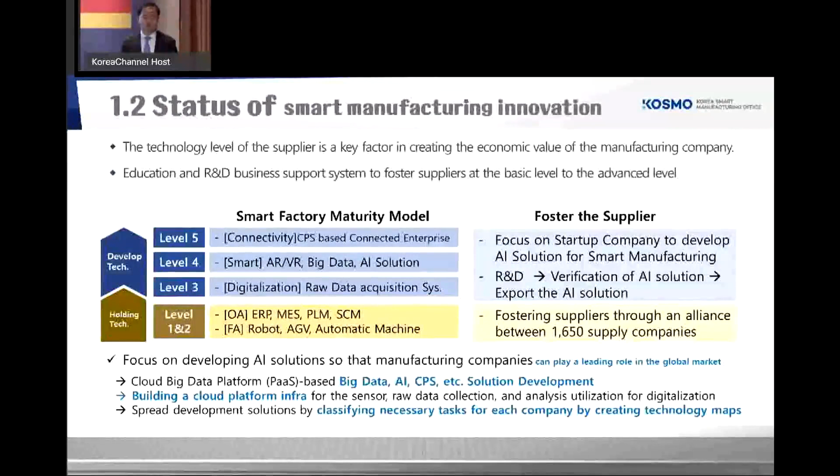We try to turn the labor-intensive industry into a technology-intensive smart factory to enhance the quality of employees' lives. If we want to build a smart factory for the SMEs, but actually most of their work is largely labor-intensive, so all of the labor-intensive work should migrate into the smart factory. So we think about how we can make it happen.

So the first thing is that we need to collect, store, and analyze the data generated from that factory, and that will be moved to cloud data. After a year, that AI technology or solution can be utilized to generate the basic pattern. Then we can generate an AI which is equivalent to 20 years of experience, the skill level of human beings. So that AI will be distributed to the SMEs.

So far I have shared what we have achieved from 2014 to 2017. We have worked with about 5,000 companies. For process performance, productivity has increased by 30% and quality has increased by 43%, and cost has been cut by about 16%. Also, for the smart factory, they have had to hire about 3 additional people, so it generates a lot of beneficial effects. What we have to pay attention to is that productivity has increased by 30%, but sales just increased by 7.7%.

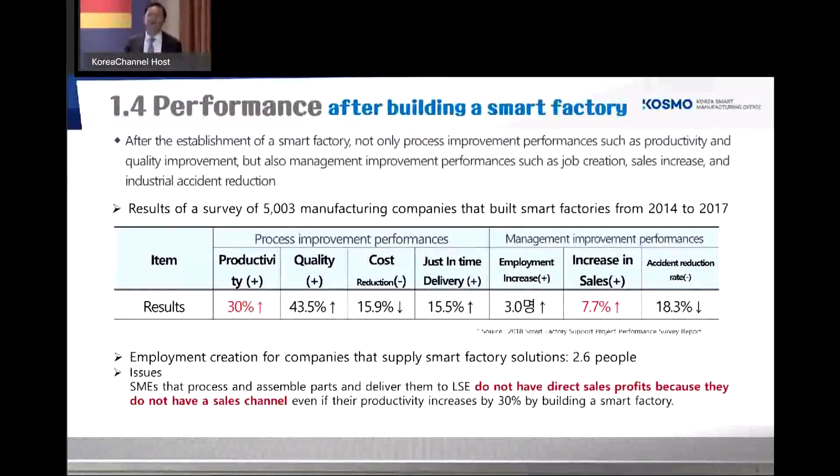We analyze why it happens. The Korean economy is largely run by large companies. So the large companies who are producing the finished products are receiving components and parts from the partner companies, who are largely SMEs. Even though the SMEs are increasing their productivity throughout the smart factories, they do not have any chance to sell more, because if the large companies don't increase the total volume of the final product, it's not directly linked. To resolve this issue...

Together with the Ministry of SMEs and KOSMO, and with 19 technopark complexes, we try to figure out how the SMEs can make the most of the increased productivity, find more sales channels, and increase their sales. That is the framework we want to build.

By doing so, there are suppliers and the manufacturing companies. There are many requirements and difficulties we have listened to from the other participating companies. The suppliers say that most of the suppliers are having a single solution, so if they are just having the single solution, they just go to the supplier. It's not easy to...

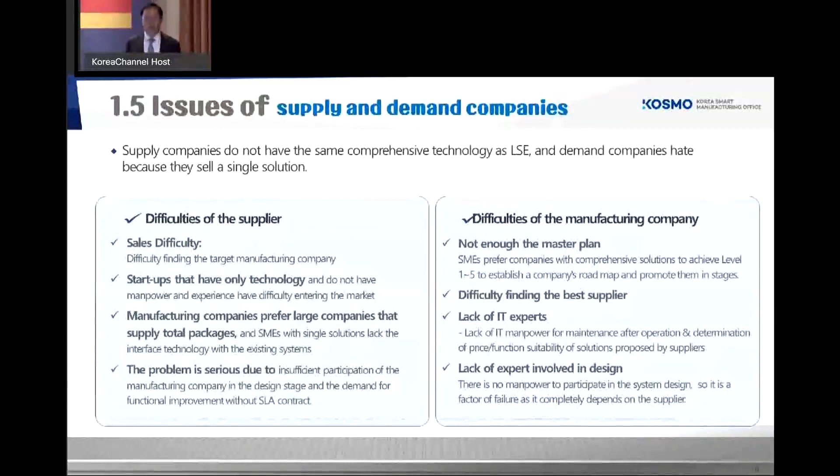So each of them have different difficulties introducing a smart factory, and we are there to resolve this issue. So we think about the total solution provider - all the different solution providers, from level 1 to level 5, can organize an SPC, M&A, or alliance so they can work together to build a single total solution.

If they achieve that kind of structure, then we can also work with larger companies depending on the industry, and the central government can give those alliances priority right to the government-led project. So we have this kind of supporting scheme to develop the total solution.

So from this year, we are building KAMP, a clouding-based platform. Every company can send all the information to the clouding platform, and inside the cloud platform there will be some rooms per each company. Then they can make the most of their data. That's the infrastructure we are building, and it has just been completed last month.

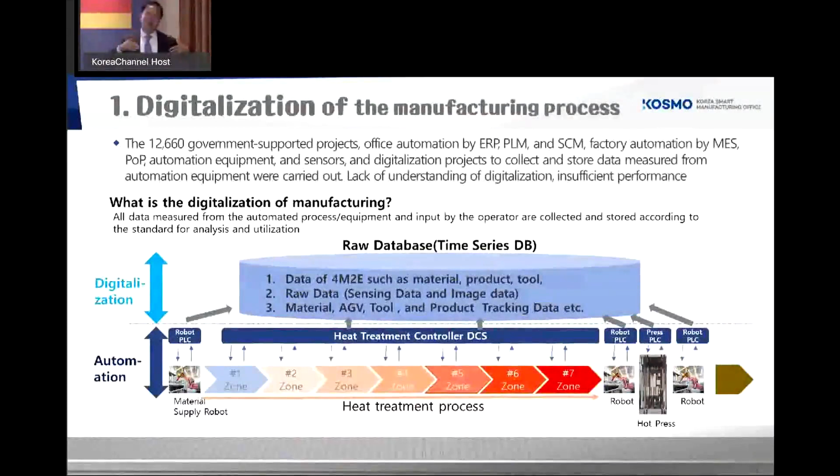So together in collaboration with Germany, as you can see on the screen, to make real digitalization of all the manual work in production, all the solutions should be utilized to make every equipment automatic. Over that automation, all the data from the production equipment should be controlled by 100 milliseconds per second.

And if we store and collect all that data on the cloud, we call it digitalization. Of course, digitalization starts from engineering and modeling first. But if we try to digitalize existing equipment, we start from all the data that is input or migrated into the cloud.

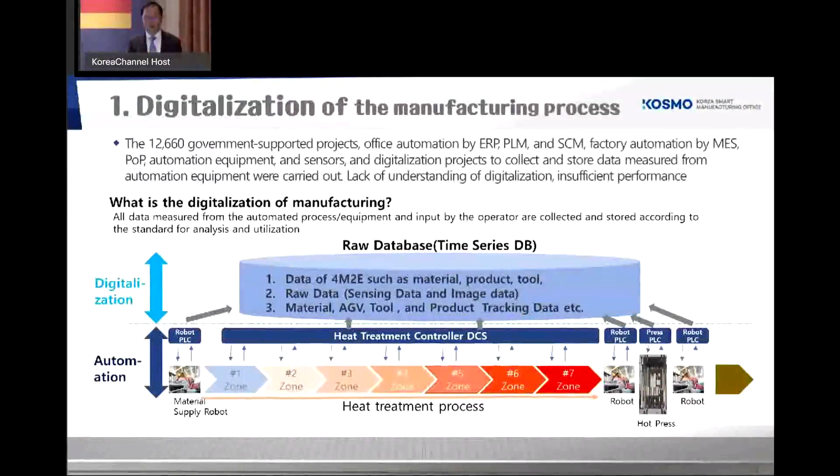Then how can we store that digitalized data? All the data measured from the equipment on the production site has to fill out the AAS template, and we create a structure of the data for each different piece of equipment. Then they can communicate between the cloud and the structure.

We try to develop the guideline and develop solutions, and then other SMEs will receive it and follow the manual to develop the digital, to achieve full digitalization.

Then we will have 3 deliverables. The first is how the properties, we need to define the properties and the frequency of collection, so all the equipment around the country should be collected in the same format.

So the first thing is the guide manual that we will develop. That is the first deliverable.

The second is from the PLC on site, we go to the cloud server to the time series data. So the second is OPC UA software.

And the third, by using the collected data, when we are utilizing that collected data, at the end of this year to the early of next year, we will prepare how to fill out the AAS template.

We will train that intensively, and when suppliers are saving the raw data of the SME, they will verify that content, and that verification will be done by the committee. Then that data will be saved onto the cloud platform.

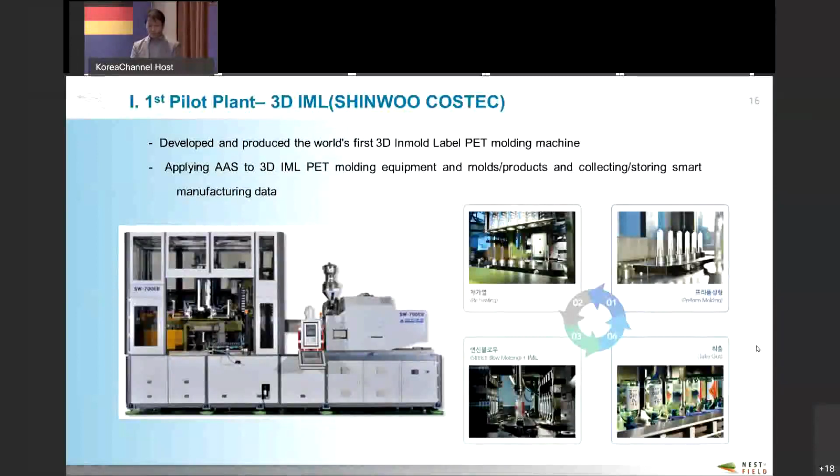As I told you before, Edge gateway and the cloud system are common, and should be common parts, and the mapping should be different among the companies. The top layer should be the same.

And we built AAS with this machine. PET 3D IML AAS, injection machine AAS. So we have this kind of breakdown structure. We'll build the AAS for each of the breakdown structure, and we'll build the property. The hierarchy level was company, factory, building, equipment, module, and parts to parts.

And sometimes we use the AAS, and if needed, we build the sub-model. Not only product, but mold and the label were included, and they were built into the AAS, which means the mold and the label will be interconnected within the AAS framework.

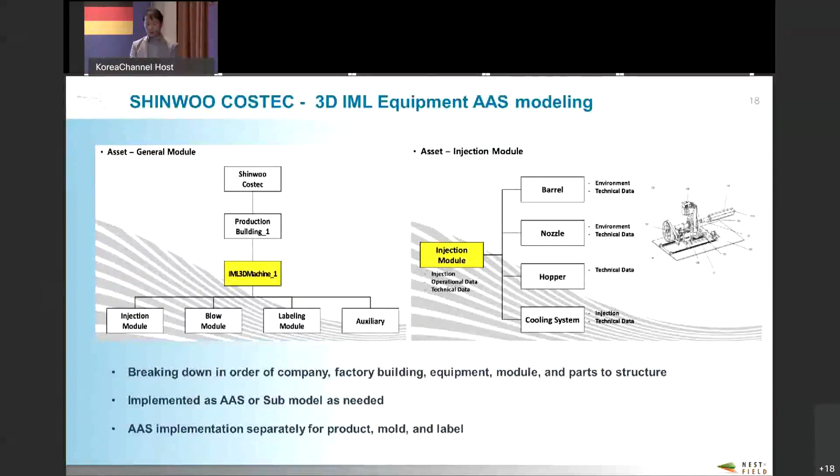This is the modeling outcome. Dr. Juyeon Lee will give you further explanation about the AAS modeling outcome.

They have 14 assets, 19 submodels, and around 408 properties for a machine. So this kind of modeling was completed, and they are in operation already. This is how the information was converted.

The cloud is providing lots of tools. For example, once you have the AAS model, the AASX package file is the outcome. And once you have the file, you can look into it and see the assets, submodels, and all the properties.

This is a tool developed in Germany as an open source program. AASX Package Explorer is the open source tool you can utilize. On the cloud, you can browse and edit the file, and we have developed another package browser for the AAS so you can directly look into the file on the cloud.

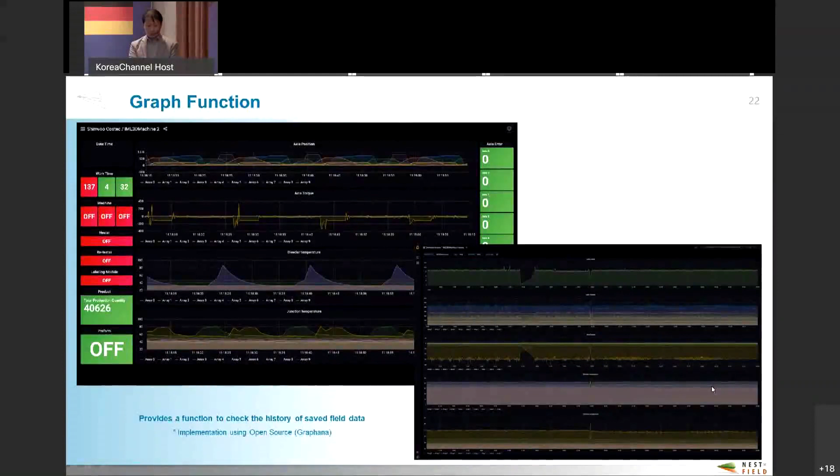A 3D dashboard was implemented on our system so you can see the various key components within the field. The so-called KPI factors were extracted, and you can have visibility in the field on a real-time basis.

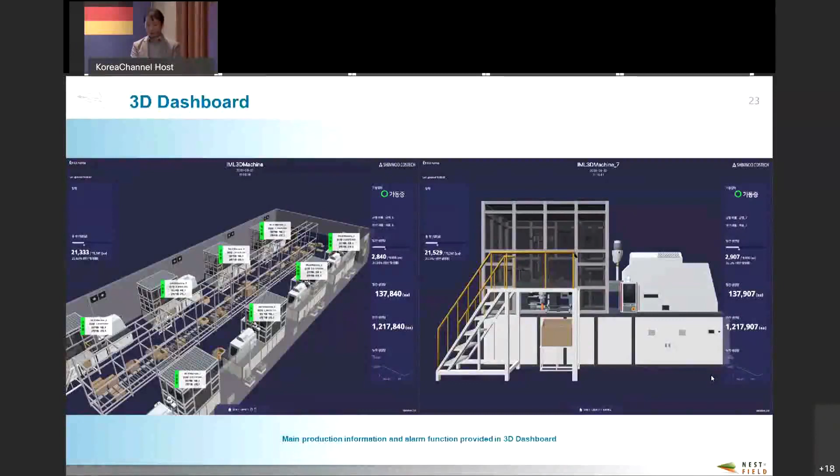The second pilot site is Huons, a pharmaceutical company. They will conduct the project in the future. They are relatively large, making ampules of vials and tablets, and we are targeting the ampule production line. We started to collect the data for the ampule production line.

There are lots of steps, for example weighing and sterilization. There will be a breakdown for each of the steps, and they will be built into the AAS so that we can collect the data for each of the breakdown structure.

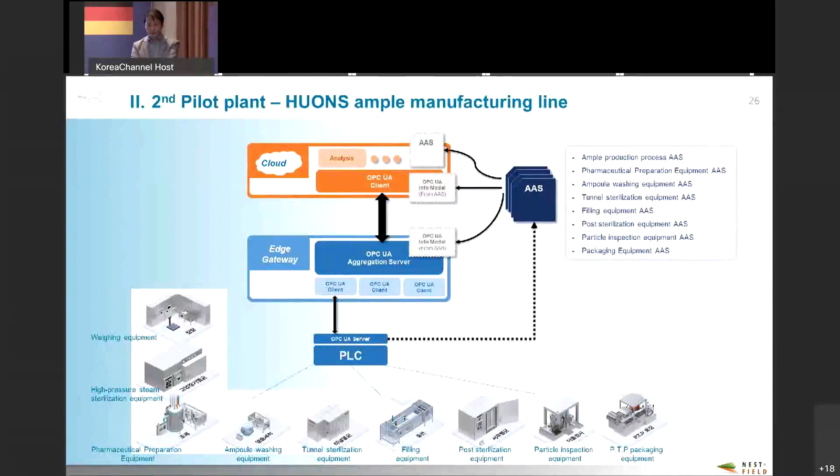Once the pilot project is finished by December, we need to scale up and disseminate this kind of project, and we need to cooperate with Germany. We've already built the interoperability verification committee, with KOSMO, Kitech, Hanyang University, and LS Electric as the Korean counterparts, and from the German side, LNI 4.0 helped us a lot.

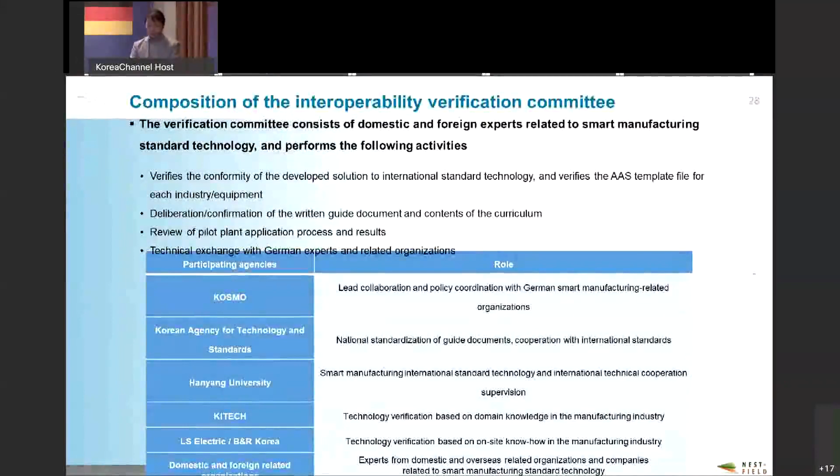We are collaborating with German experts for standardization and open source, and we are hosting this kind of forum together. And in November, the Industry 4.0 book will be translated and published. Once Corona is gone, we're going to have another conference.

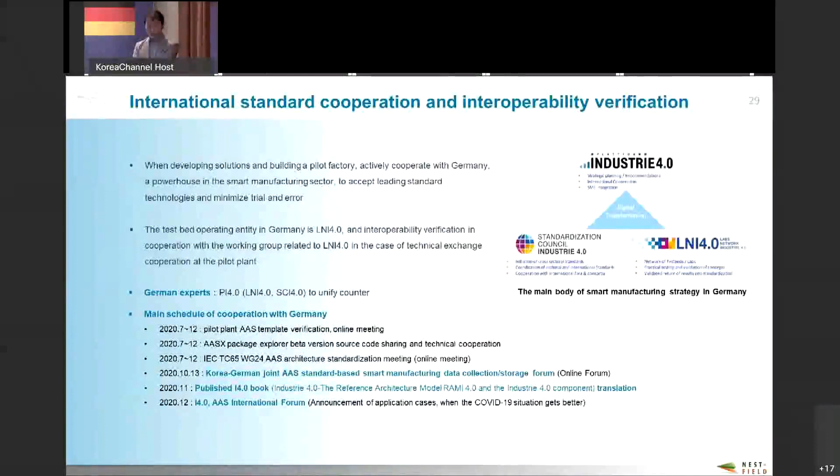Currently, we are working on the pilot project, and we are going to build the guideline for AAS application. We are working with the Korean Standard Agency, and we need to distribute the standard documentation. The Industry 4.0 book will be translated and published, and in addition, we are going to distribute the standard guide document.

Solution installation and operation guide documentation will be made and distributed. Training will be provided to the demand companies and supplier companies. That's it from me, thank you.

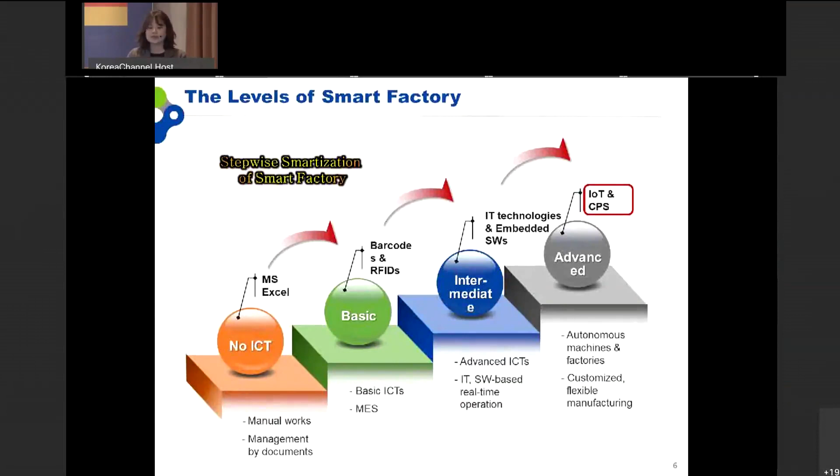Actually, Smart Factory has 4 different stages. The highest level is advanced, where CPS has been perfectly implemented. That's called the advanced stage. Many large companies have put a lot of effort to realize and implement CPS. CPS is not a single concept, but a very big concept and a single paradigm. It's very difficult to define in one sentence, but let me try.

The concept of CPS is combining physical system and controlling computing elements. It's a network-based distributed control system. When CPS is applied to the manufacturing environment, it's called CPPS. That means some actuator, sensor, or production elements become networked and intelligent, and that is key to smart production implementation.

There is 4M2E. You might be familiar with 4M, which stands for machine, man, material, and method. And for cyber, there's 4M data and model, and how we deliver what information, when, where and why. These two are realizing the cyber production system. That means the equipment in the real environment will be transformed into the virtual environment, and through the communication system, these two will be synchronized. The synchronized data will be analyzed before manufacturing or verified afterward. That is CPPS.

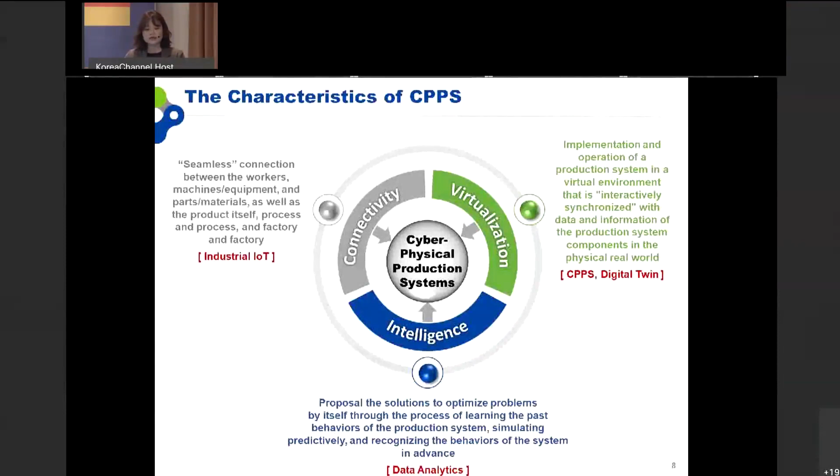So let me give you an explanation about AAS. Before that, there is some object in the physical world, and that is called an asset in the information world. Asset Administration Shell is that one. When we try to turn the object in the physical world into the asset in the information world, it's a collection of information in a mechanically processable manner. They have to have a unique identifier.

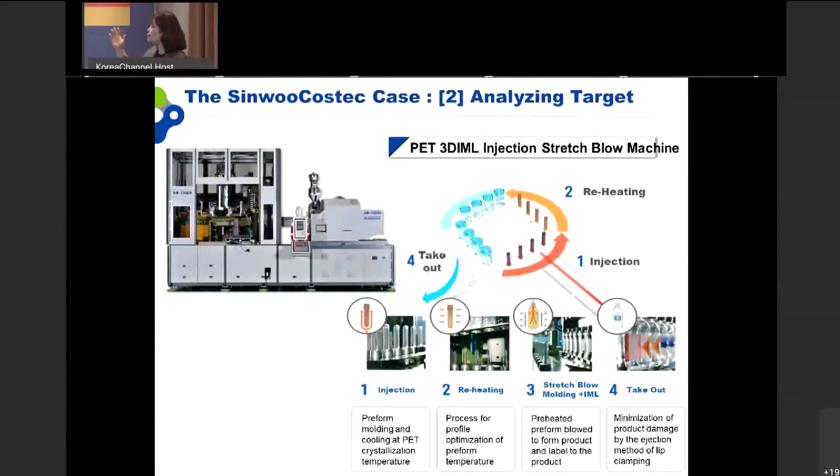We understand the process first, and then we get the structure related to the data. The third stage is modeling the asset itself. The first thing you check is the process—this is about the whole structure and logistical flow.

All flows on the screen are not translated into the asset—we just try to find one relevant to modeling the asset. Actually, the injection module defined the asset because injection is one of the most common assets with common characteristics that many Korean SMEs are using.

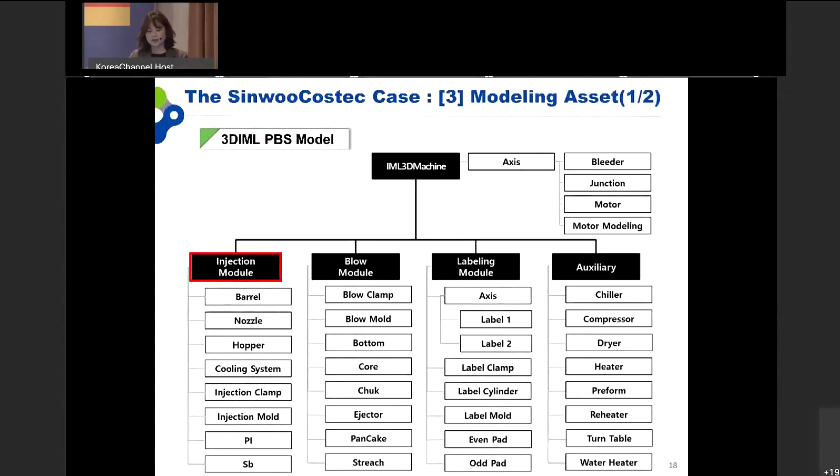After this test pilot project, we developed a little further based on the injection module, breaking it down further. This is the field data we received from the factory, which is also technical information mapping. For the product data, we didn't do AAS ourselves—another consortium did that.

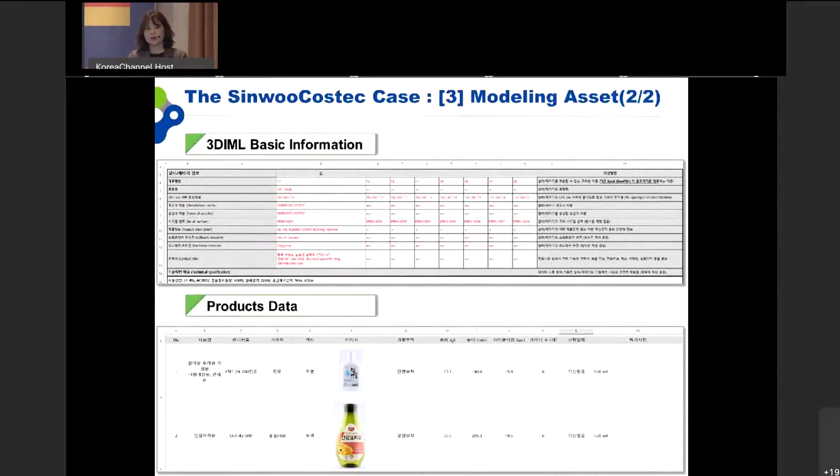After modeling the asset itself, we then have to go through the AAS modeling. It's not the complete version—we are doing it only for one factory. This will be continuous work. Let me show you how this format is structured.

As you can see here, it's based on an Excel sheet because many people working in the factory are familiar with Excel. It shows what the asset is, what kind of hierarchy they have, what the submodels are, and what the properties are.

The IRDI of the properties and its mapping are also shown in the Excel sheet. Not only the IRDI, but the unit of measure, the actual operation data, and every relevant piece of information are stored and input in a single Excel sheet.

The fifth stage is after modeling the AAS, we are implementing it. We have used the AAS Package Explorer. We repeated this work a lot due to trial and error, but now we can use this tool much easier compared to the first time. There are two versions, editing and viewer. With the editing version, you can easily map and define relations.

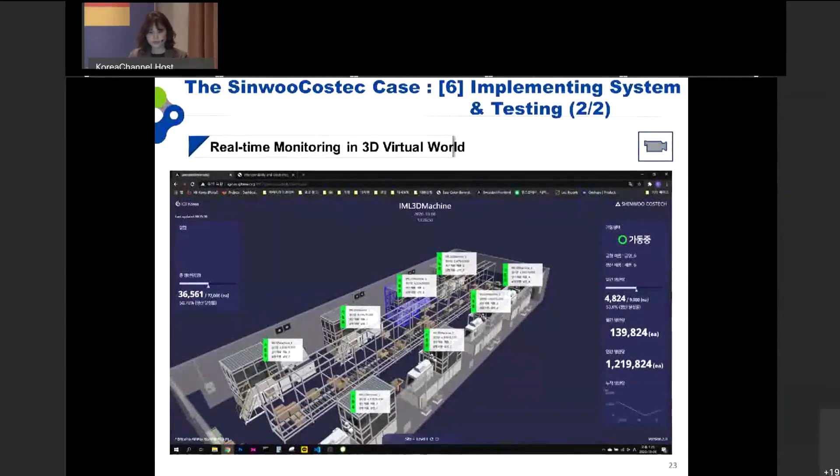You can see 8 different equipment, and you can also see very detailed videos. On the screen, it shows 8 different equipments.

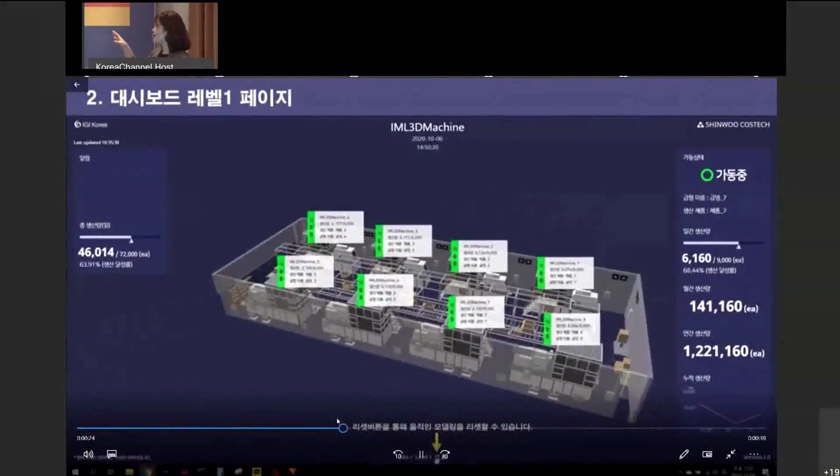The key KPI is shown in real time, the productivity and what alarms have been activated. If an alarm is activated, the color changes to red and the operation is suspended.

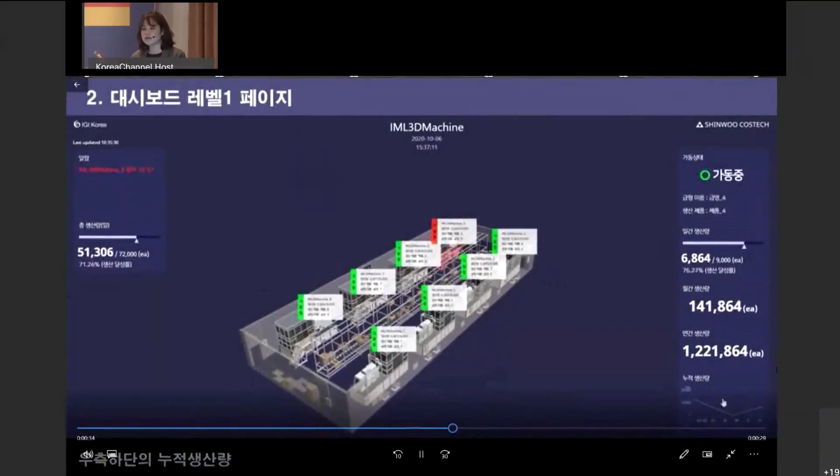So it's 3D based, visualizing the screen, and the accumulated production can be maximized depending on the needs of the user.

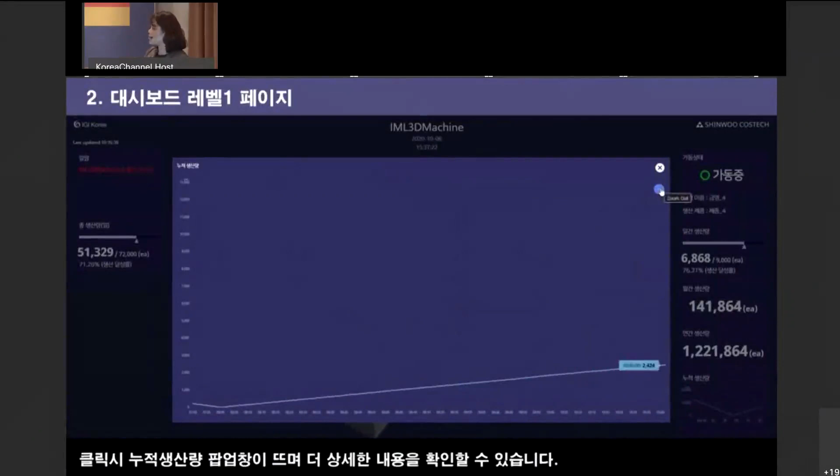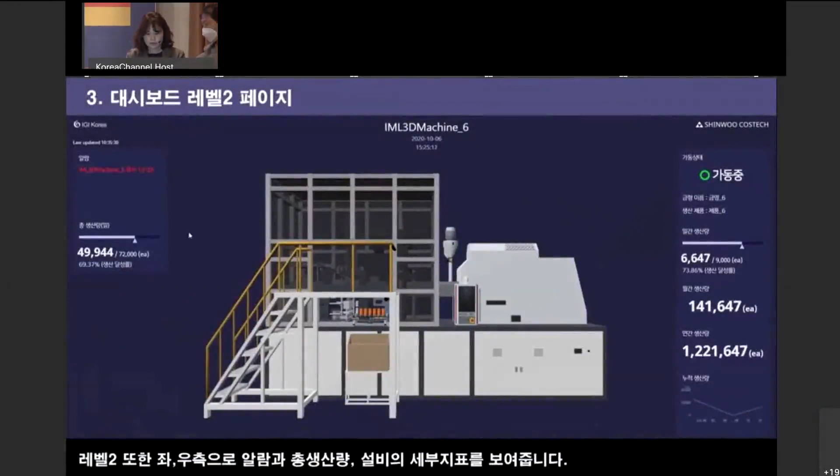This 3D visualization is not yet perfectly implemented. We keep updating it, and we are still developing the best and optimized 3D visualized screen for the user. It shows every piece of information about the equipment in real time.

This is the conclusion page. The reason we are sharing this actual case is that I don't think you want to know specific details of just one single case. I think based on these experiences, you want to see what direction we want to head towards. I'm not that experienced, but I'd like to share some recommendations for you to develop this further.

First, when designing the system, we need to define the scope and the candidates for implementation. The AAS itself has a very wide scope, and if you want, it can express everything. So from the modeling perspective, before doing the modeling, you have to define the subject and the candidates as much as possible.

If you define it well, you can complete every stage easily without much change. The second thing is that we just believe in modeling - if modeling is done, we think everything will be done. But before the asset modeling, the asset design itself needs to be defined. The physical structure should be defined, what data needs to be input, and what kind of dynamics is required. After that, you can create the AAS.

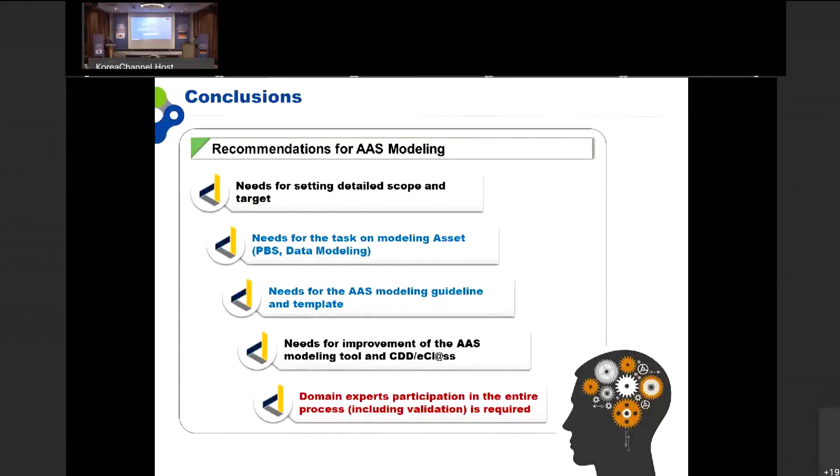Let me share some comments. Dr. Lee and President Kim have worked for about the past year to develop and model AAS. They began from nothing, so they are really trailblazers. They created paths for the followers, and will develop guideline documents in the future. These two people are trailblazers here in Korea, and they will share every information with you. If you're interested in AAS, you will have very clear and easy to understand guidelines.

AAS seems very complex to some of you, and it's very difficult to create at the very first trial. But once you develop it, you learn a lot, and throughout the whole life cycle, from developing and describing, you can also communicate with other factories. That's very difficult at first, but once you have developed it, it's much easier. If you have one piece of equipment at the very beginning, it's not easy to maintain by yourself, but you become accustomed to it later on, just like that.

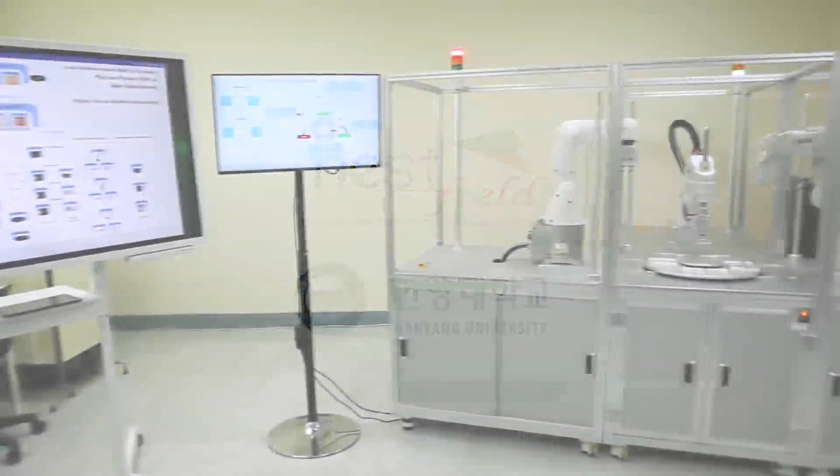This is a demonstration system of Asset Administration Shell, AAS-based plug and produce, in smart manufacturing, co-developed by Nestfield Ltd. and Hanyang University.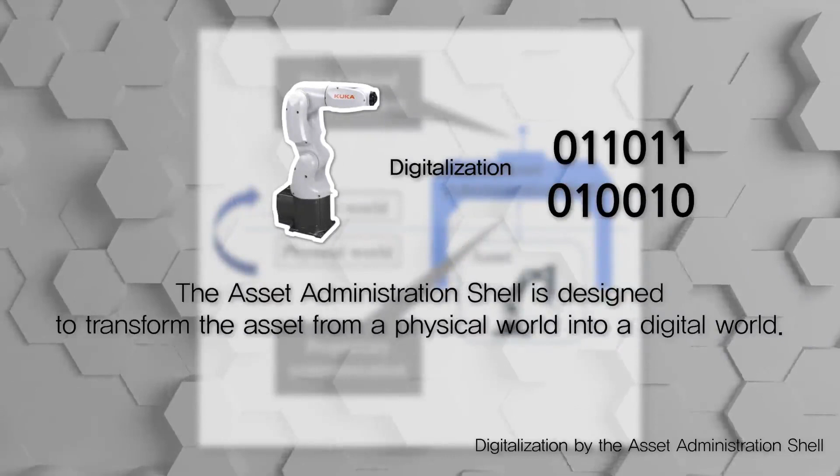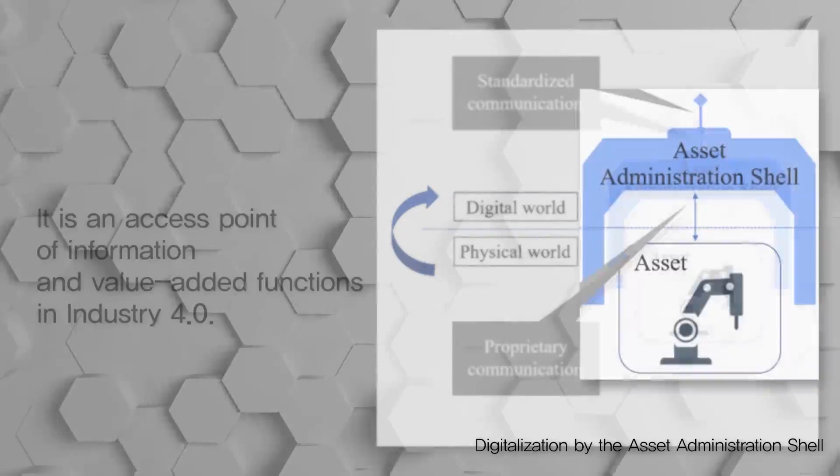In the era of Industry 4.0, one of the key challenges is how to digitalize industrial production. The Asset Administration Shell is designed to transform the asset from a physical world into a digital world. What is Asset Administration Shell? It is a virtual representation of all the information and functionalities of an asset. It provides a standardized communication interface for information exchange. It is an access point of information and value-added functions in Industry 4.0.

Why is Asset Administration Shell needed? Its purpose is to facilitate the exchange of asset-related data along the production system life cycle. The Asset Administration Shell will make all manufacturing components interoperable to realize the autonomy of Industry 4.0. The Adaptable Factory envisions a flexible factory where production lines can be reconfigured during runtime.

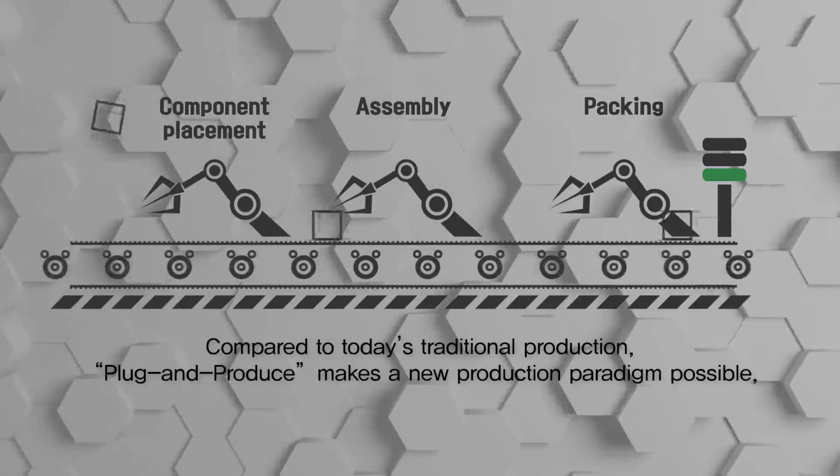This is analogous to the plug-and-play concept for desktop computers. The vision of the plug-and-produce use case is to enable plug-and-produce capabilities for future production facilities. Compared to today's traditional production, plug-and-produce makes a new production paradigm possible.

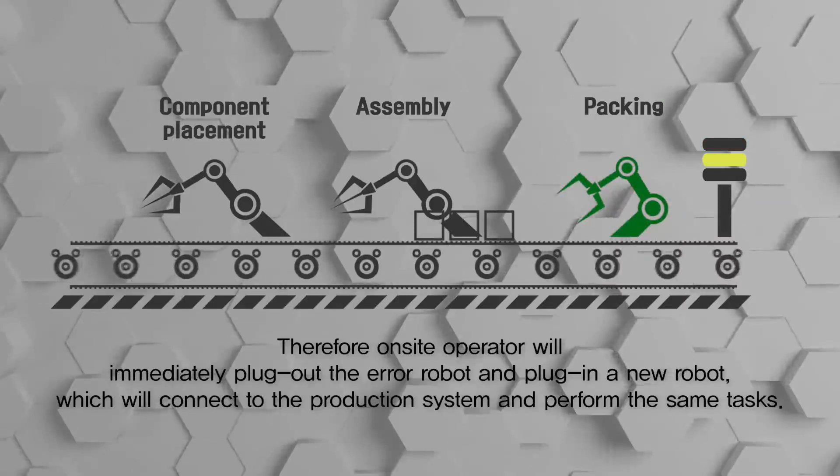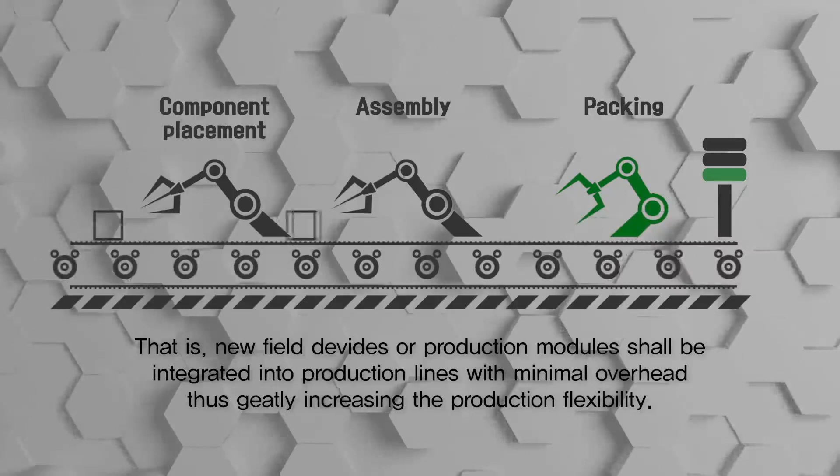If there is an error with the working robot, the production line will stop. Therefore, the on-site operator will immediately plug out the error robot and plug in a new robot, which will connect to the production system and perform the same tasks. New field devices or production modules shall be integrated into production lines with minimal overhead, thus greatly increasing production flexibility.

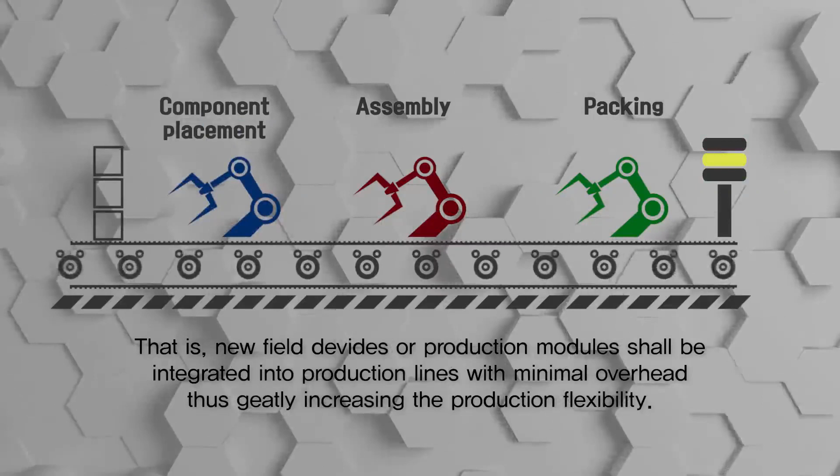The AAS-based P&P demo system has a 3-layer architecture. The top decision-making layer controls the whole system running using a web UI. The middle AAS layer is the AAS platform supporting AAS information exchange. The field asset layer contains 3 type-independent industrial robots and 1 turntable.

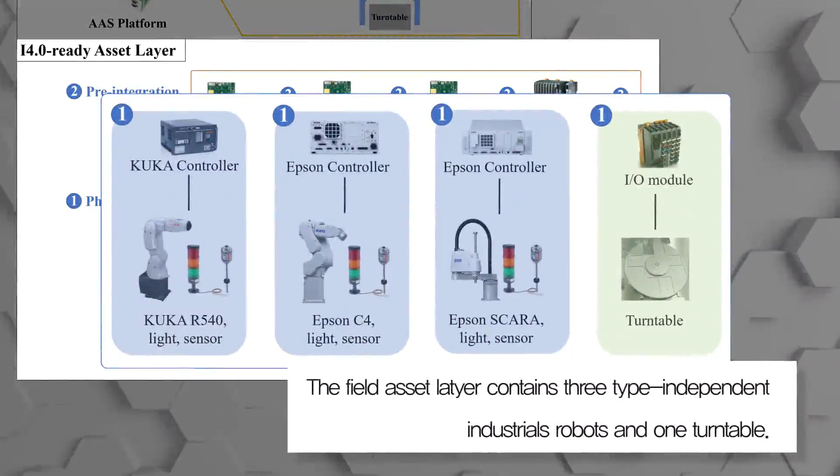This is the demo showing AAS, Asset Administration Shell-based plug and produce in smart manufacturing. AAS plays the same role as the digital twin in smart manufacturing. Key characteristics of this AAS-based P&P system are threefold. First, each asset, for example robots and turntable, has a unique AAS. Second, asset information is digitally represented in the AAS. Third, AAS can communicate with each other to realize the P&P function.

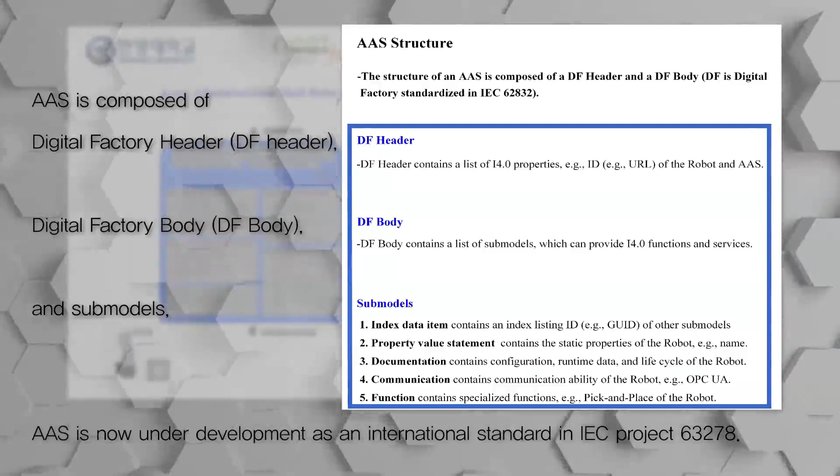AAS is composed of Digital Factory Header, DF Header, Digital Factory Body, DF Body, and submodels. AAS is now under development as an international standard in IEC Project 63278. Asset information are stored as properties in the AAS submodels, and the AAS has a communication interface to exchange data with other AASs. This is the information model of the AAS for KUKA robot.

The DF header contains basic AAS information, for example, identification of asset and identification of AAS. The ID is in a format of Globally Unique Identifier.

The DF body contains 5 submodels: 1. Index data item, 2. Property value statement, 3. Documentation, 4. Communication, 5. Pick and place. The pick and place submodel is an asset-specific submodel, which is designed for KUKA robot to store and exchange pick and place related process data.

How to implement the AAS? First, we use AutomationML, standardized in IEC 62714, to model AAS information of the P&P system. AutomationML is an XML-based data format that is suitable for describing information in AAS submodels. AutomationML contains an instance hierarchy module, hierarchically modeling individual objects as internal elements.

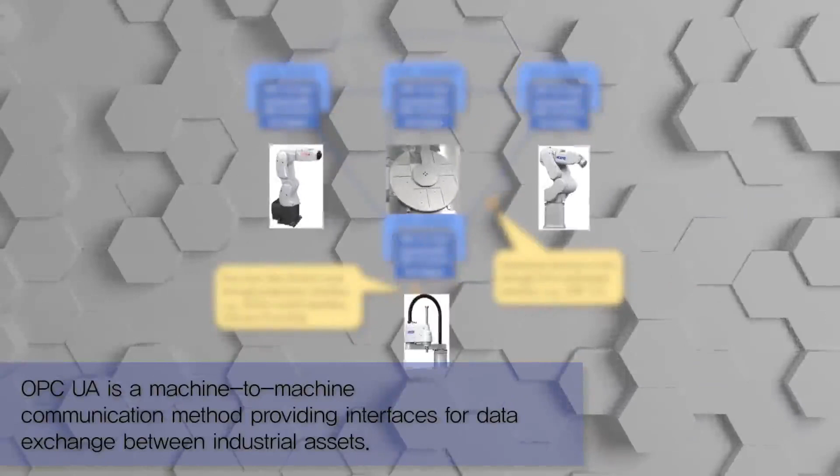Second, we use OPC UA, standardized in IEC 62541, as the communication interface to exchange data between AASs. OPC UA is a machine-to-machine communication method, providing interfaces for data exchange between industrial assets. We adopt OPC UA client-server mode to realize the communication capability of AAS. By utilizing AutomationML and OPC UA, AAS realizes the P&P capability in Industry 4.0.

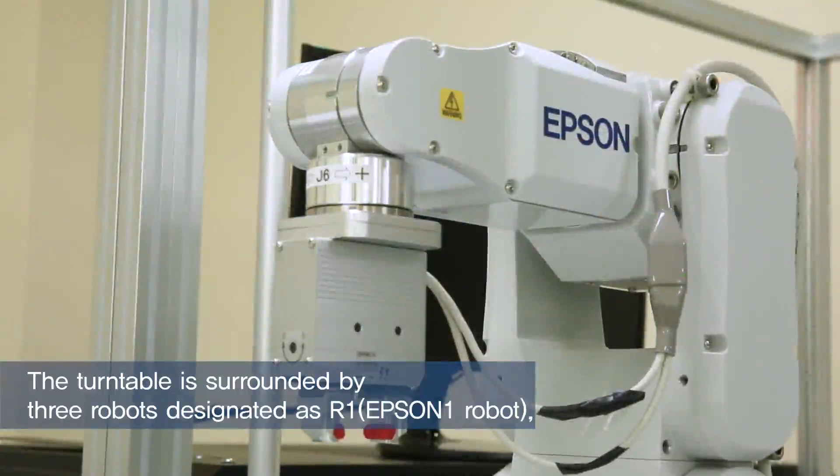The turntable is surrounded by 3 robots, designated as R1, Epson 1 robot, R2, Epson 2 robot, and R3, KUKA robot. The web UI controls the system operating in operation mode and PnP mode separately.

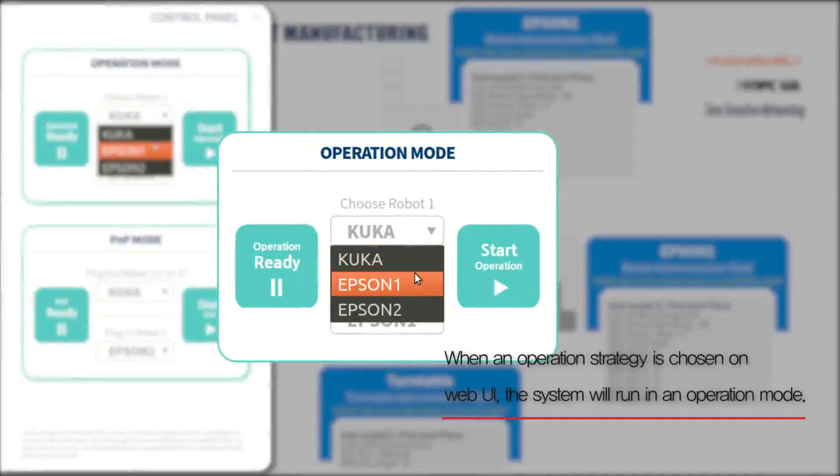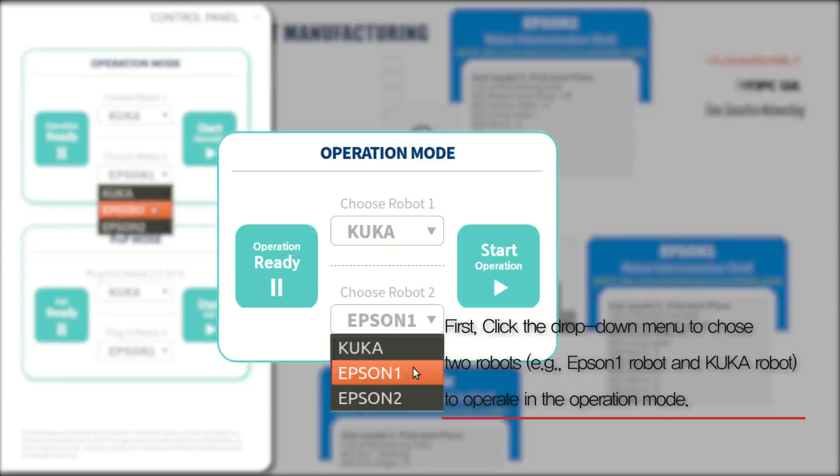When an operation strategy is chosen on web UI, the system will run in an operation mode. First, click the drop-down menu to choose 2 robots, for example, Epson 1 robot and KUKA robot, to operate in the operation mode. Afterwards, Epson 1 robot and KUKA robot are executing the pick and place task on the turntable in an operation mode.

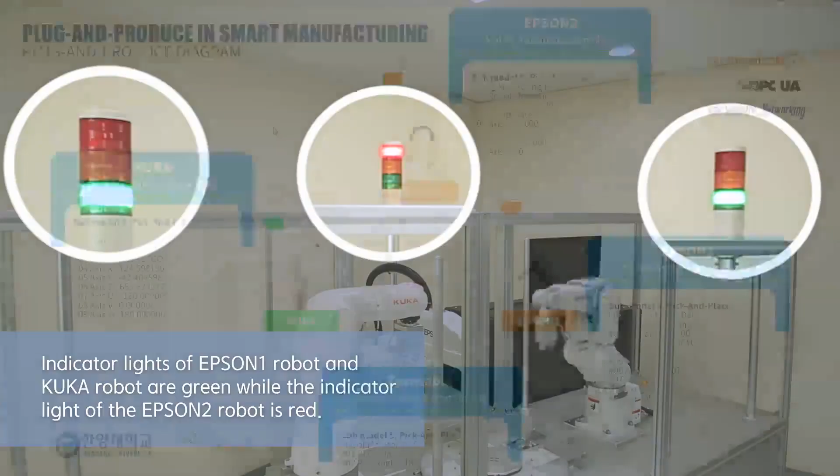Indicator lights of Epson 1 robot and KUKA robot are green, while the indicator light of the Epson 2 robot is red. Finally, real-time AAS data of robots and turntable are monitored on the Web UI real system. Operation is synchronized with the virtual animation on the Web UI.

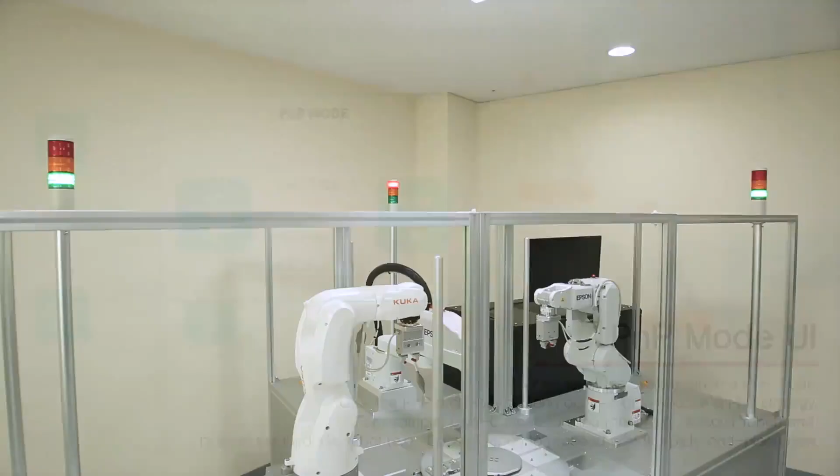In order to let the system run in a PnP mode, click the PnP drop-down menu on Web UI to choose a PnP strategy. For example, plug out one running robot, for example, Epson 1 robot, and plug in the third idle robot, for example, Epson 2 robot, to proceed with the pick and place task. At this time, all indicator lights of the 3 robots turn to yellow, indicating the PnP configuration process among 3 robots and turntable. During this process, AAS of robots and turntable will communicate to determine the operation of corresponding assets.

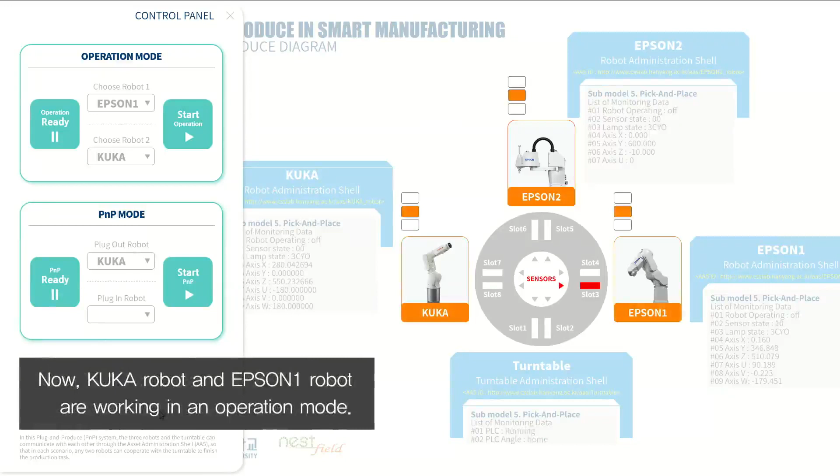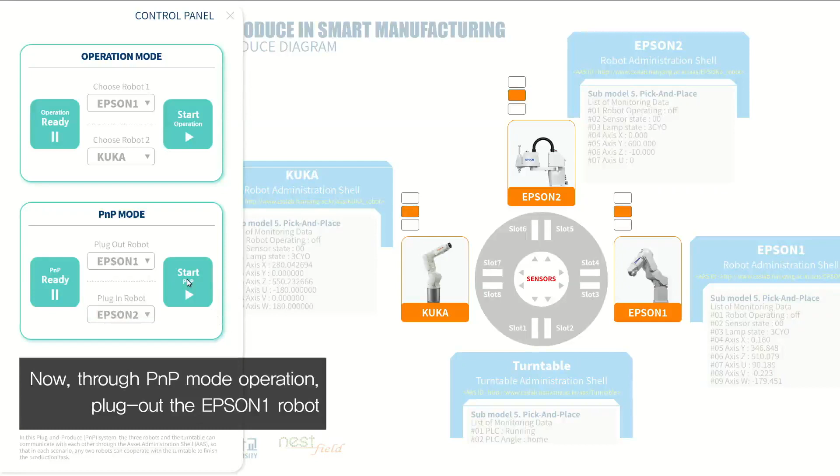Now, KUKA robot and Epson 1 robot are working in an operation mode. Now, through PnP mode operation, plug out the Epson 1 robot, plug in Epson 2 robot. Now Epson 1 robot is plugged out, Epson 2 robot and KUKA robot are executing the pick and place task on the turntable in a PnP mode.

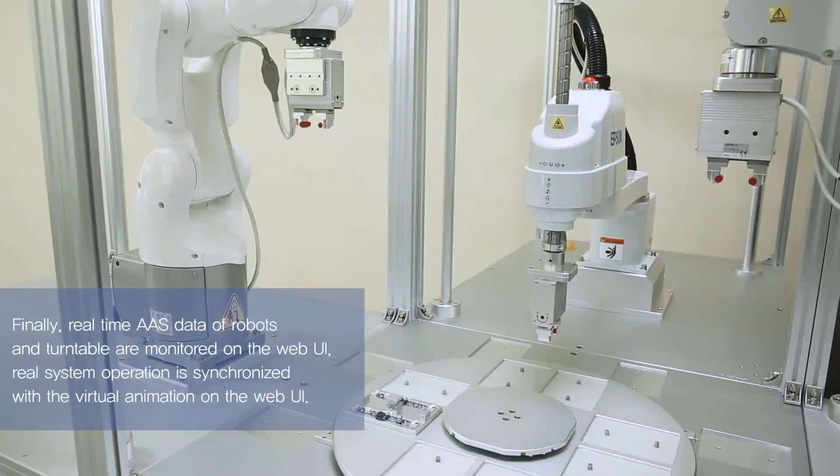Finally, real-time AAS data of robots and turntable in the PnP mode are monitored on the Web UI. Real system operation in the PnP mode is synchronized with the virtual animation on the Web UI.

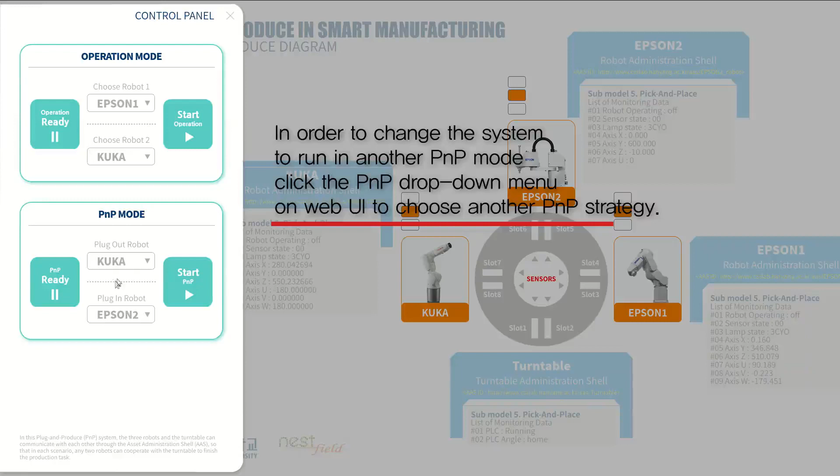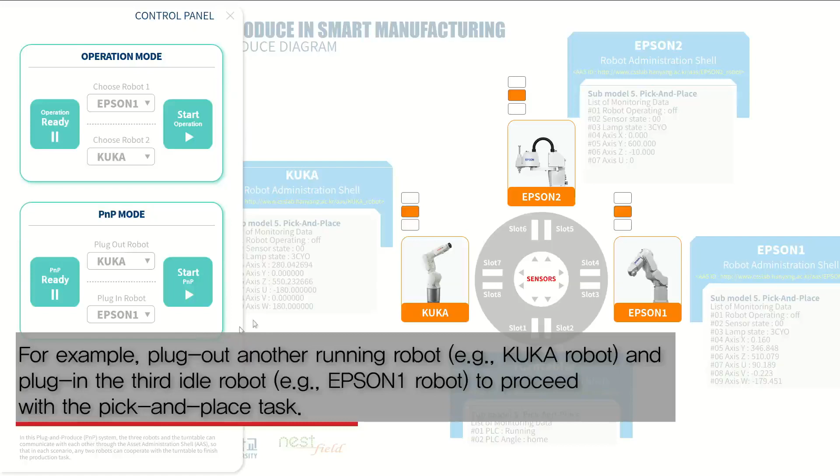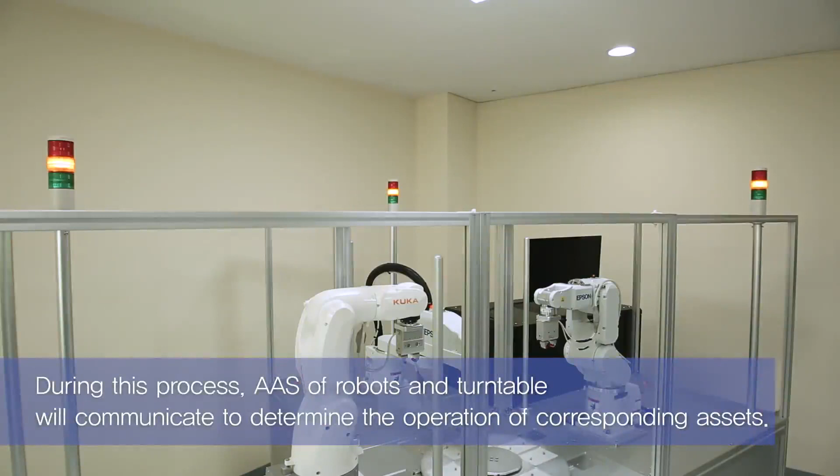In order to change the system to run in another PnP mode, click the PnP drop-down menu on Web UI to choose another PnP strategy. For example, plug out another running robot, the KUKA robot, and plug in the third idle robot, the Epson 1 robot, to proceed with the pick and place task. At this time, all indicator lights of the 3 robots turn to yellow, indicating the PnP configuration process among 3 robots and turntable. During this process, AAS of robots and turntable will communicate to determine the operation of corresponding assets.

Epson 2 robot's status light turns green to signify movement. Now KUKA robot is plugged out. Epson 1 robot and Epson 2 robot are executing the pick and place task on the turntable in a PnP mode.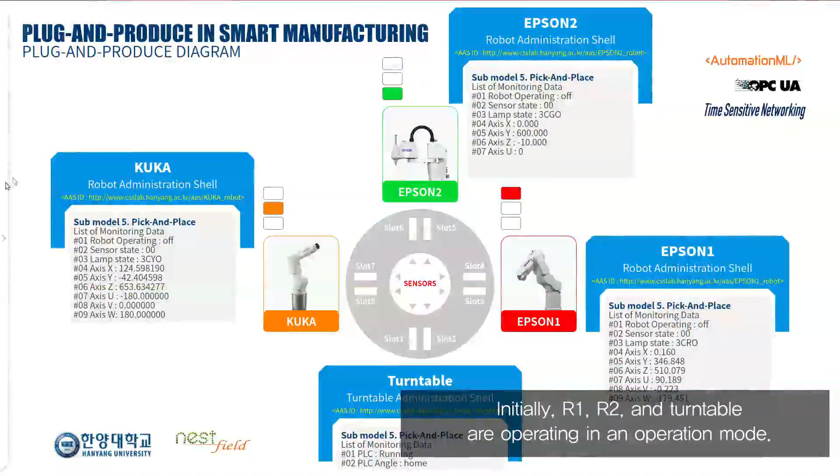The figure shows the sequence diagram illustrating the information flows among AASs. Following the diagram, robots and turntable can operate in accordance with the chosen P&P strategy. Initially, R1, R2, and turntable are operating in an operation mode. When a P&P strategy is selected on the Web UI,

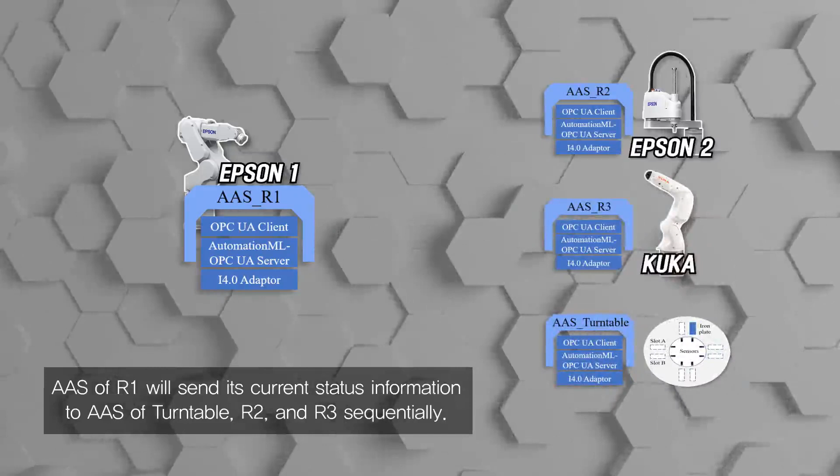It will be delivered into all the AASs in the AAS platform. AAS of R1 will send its current status information to AAS of turntable, R2, and R3 sequentially. And AAS of R3 will order R3 not to operate anymore. After everything is confirmed, the PNP mode ends and the PNP strategy is carried out successfully. Finally, the AAS platform will feed updated information of all involved AASs back for showing on the web UI.

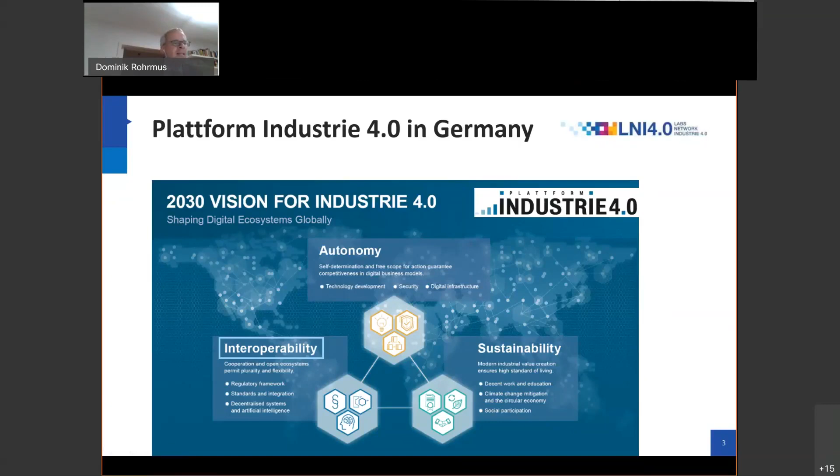Also very important is social participation. We have to have society acceptance for what we do here and what we propose. We have to have all our workforce behind us. They have to somehow like it and understand it. This is extremely important.

This slide shows a very complicated setup from your perspective, but it is somehow necessary. I would like to briefly show you how we organize Industry 4.0 in general in Germany. That is beyond only asset administration shell. This is the entire organization on a national governmental level. We have a top-down setup, and this is necessary in Germany. It is, so to say, a cultural good.

This top-down takes care of internationalization. You can see Korea is on the same level as China or the United States of America. Certainly, Japan is very important for us with the Robot Revolution Initiative, already mentioned by President Park from Cosmo. But also India is kind of important for us. And on the other side, very naturally, the European Union. The European Union is really the core for our peace and our wealth. So we very closely collaborate with France and Italy, but also with smaller countries in Europe, like the Netherlands or others.

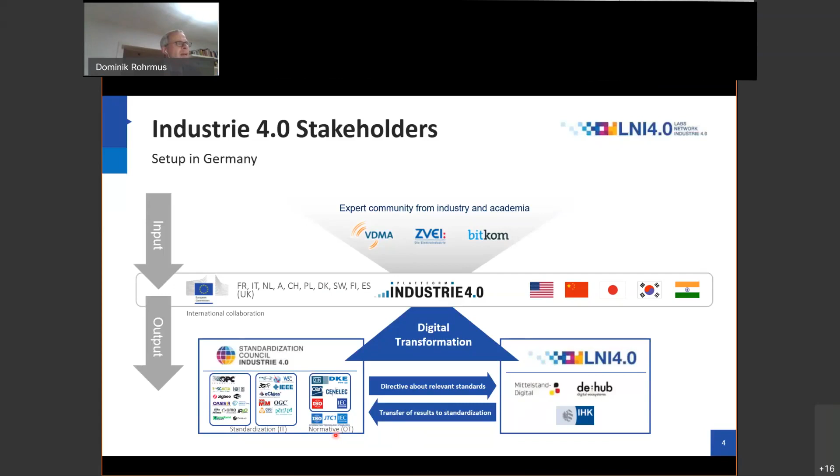So, next slide. How do we operationalize this? In Germany, we have 26 so-called competence centers.

They are all funded by the national government, by the German central government, by the Ministry of Economic Affairs. You heard at 2 p.m. a brief presentation from the representative of the Economy Ministry. Dr. Gröteke gave you a 10-minute introduction.

This is necessary because the culture of small and medium enterprises in Germany means they don't like to drive very far, so you have to have something in the region. If it comes to very special problems, the center will delegate to other centers to go more deep. But the first intro for the project can take place everywhere, in the smallest places in Germany. This is our principle, and LNI works together with all 26.

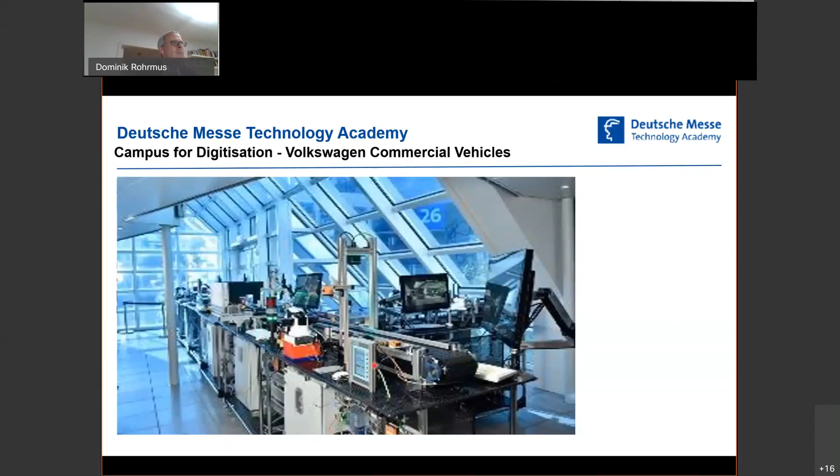This might work for some images with low frequency and low rate. But in general, if you ask me for a general statement, there is still an edge layer in between where processing takes place.

In the fairground of the Hanover Fair, there's a big 5G so-called campus network. This campus network is very important for us because it's very interesting — it covers all providers of 5G technology. For instance, Samsung and other partners globally have devices there, have technology there where you can hook up to. And it is a private 5G network.

So you might imagine that this is not a 5G network provided by KT or SK in the usual way. It is operated by the fairground itself. We have a law in Germany where a certain frequency, 3.7 to 3.8 gigahertz, is reserved for so-called campus or private networks. So you, in your factory or fairground, have private 5G, put it this way. You can then ask an operator like KT or SK to build it for you and set it up, but it is still private. They are not allowed to use your installation for public use. It is still private.

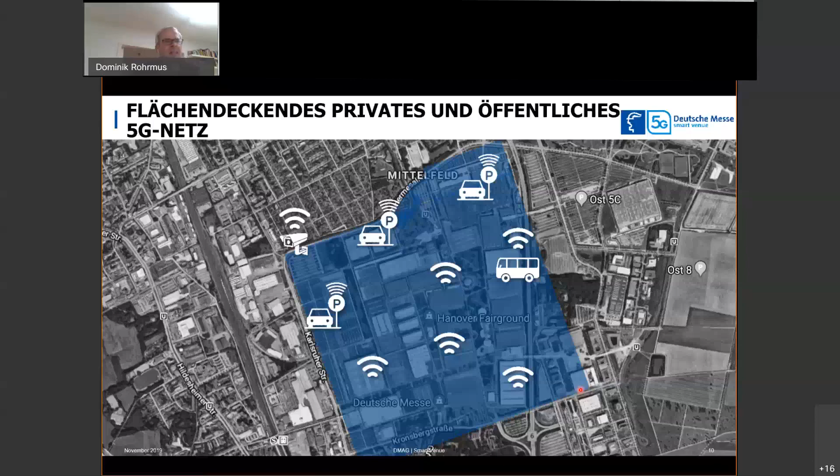And we will connect this 5G network with our testbed.

And based on that, we can execute. So again, it covers, for instance, assembly and education.

So this testbed has a home. It is in the fairground in Hanover, in Hall 26.

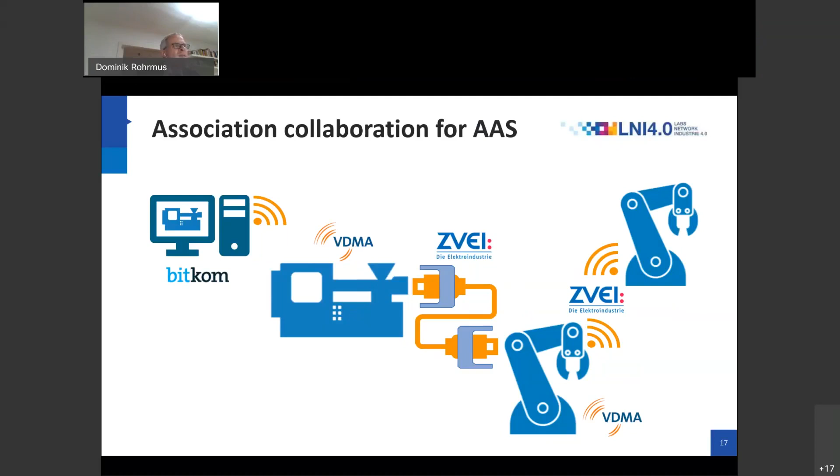The formal definition is that everything that requires a connection for an Industry 4.0 solution - this is the formal definition.

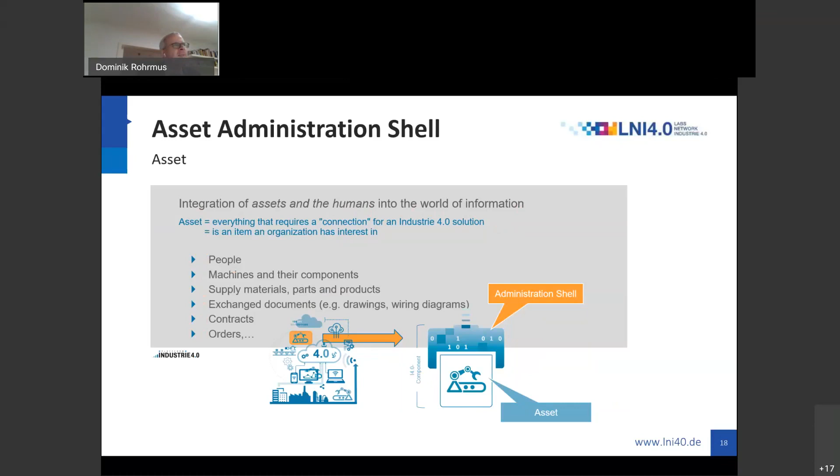The overall goal is the integration of an asset and the humans in the world of information. As I mentioned before, it covers humans, the machines, the entire supply, the documents, which is so important, contracts, and many others. And what is the asset administration shell?

This excellent presentation of the PhD student who was talking before me gave already some insights here, and I would like to elaborate it a little bit more. There are many, many digital twins, for instance in biology or in chemistry or in the construction field or architecture. They are also having digital twins.

When it comes to digitalization of industry, smart manufacturing, or Industry 4.0, for us the digital twin is the implementation of the digital twin. So the asset administration shell is for us the implementation of the digital twin. So digital twin for Industry 4.0, we call that asset administration shell. This is what we call asset administration shell.

And it has some properties which are very important for us. It must be cross-company, it must enable multi-vendor interoperability. This is a must-have. And very important for us, it is available for intelligent and non-intelligent products.

We saw before the example of Nestfield and also the presentation of the PhD student, where we saw on one side the machine and on the other side the shampoo bottle or the soy sauce bottle. For us, also the soy sauce bottle, which has no electronics implemented and just has a barcode label printed, it is non-intelligent but it can be completely represented in an asset administration shell. That asset administration shell could cover, let's say, the material, the plastic, the PET plastic which it consists of.

On the asset administration shell, many things have been said before, so it's quite easy for me, and I can focus on a few specific items. As we have heard before, the asset administration shell is a digital twin of an asset in the domain of smart manufacturing, and this requires some standardization activities.

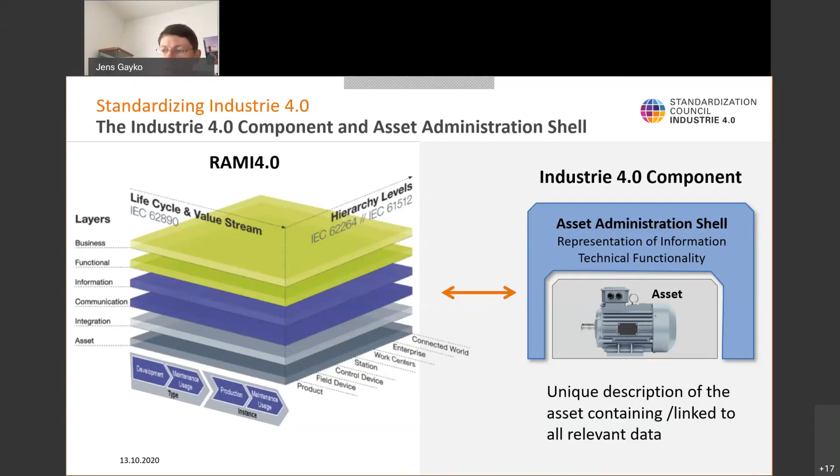So in general we have a kind of container format with a standard format, and then we have different technology-dependent formats like, for example, OPC UA and AutomationML, as we have seen before.

As we heard before, it's more than just the data format. You also need the interaction models. By use of semantic properties, you can achieve a kind of translator between the different languages of Industry 4.0. Or to say basically, we don't need these different languages, because we have an interoperable machine-readable format, and we achieve semantic interoperability.

We have heard about semantic properties, and this will play a very important role. We have also heard there is not just one repository for semantic properties, but there are different ones. Namely, at IEC there is a common data dictionary, IEC CDD, as described in the IEC 61360 series, and also other standards. Besides that, there is a consortia-based repository called eCl@ss. And maybe there will be further repositories, or there could even be properties defined between business partners, for example a manufacturer, an integrator, and an operator of a plant. Even if they like, they can define their own properties.

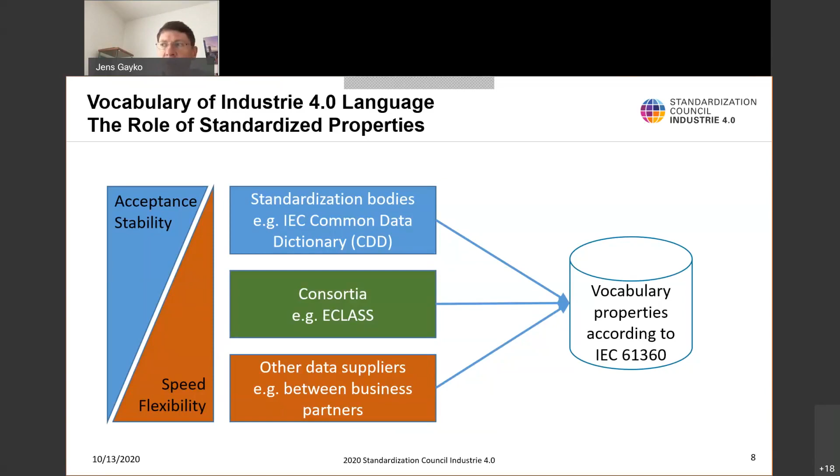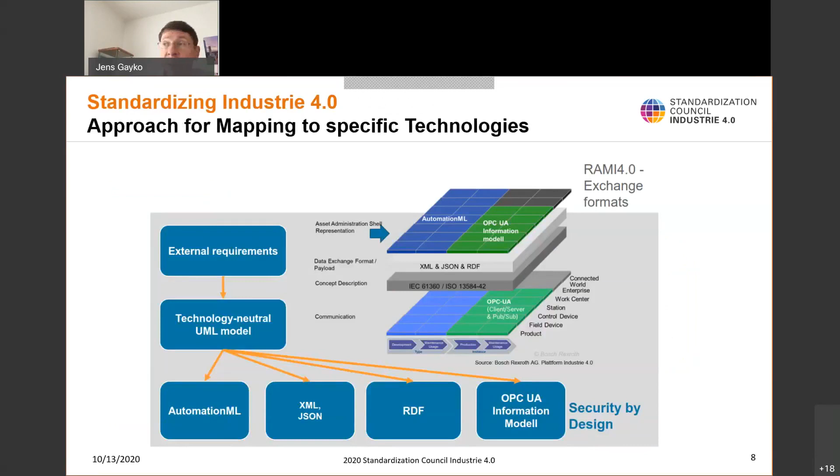And here again, it's not a competition among these repositories, but we need cooperation. This is currently one activity we started. Since the beginning of this year, there is a close cooperation project between eClass, ISO, and IEC, and we are preparing a project to bring these two repositories closer together. We heard already about the mapping to different technologies like AutomationML, OPC, and so on, and this is also quite important for our activities.

This brings me to the conclusion of my presentation, where I summarize our activities, which give a direct link to potential closer cooperation in the future. First of all, the -1, the first standard of the IEC 63278 series, is launched, but there will be further standards in this series, for example on interaction models, infrastructure services, mechanisms for security, and so on. This is something where we need international cooperation to successfully develop these standards.

As a second activity, we need the extension of the repositories for semantic properties. This includes a seamless coexistence of the different repositories, for example a cooperation between the IEC CDD and the eClass repository. Here too we need support from different countries, and I think this is a good chance for cooperation.

Next is the modeling of aspects of assets, these so-called submodels, as we heard before. One example is the digital nameplate, containing all the information we have today on the physical nameplate of a product. Currently there is a new work item proposal open for ballot at IEC Subcommittee 65E, and we would like to start closer cooperation here. This is an interesting project because we have the technical aspect of how to model the data in a submodel, but also a non-technical aspect, since it would be ideal if this digital nameplate could be accepted in many regions of the world by governments.